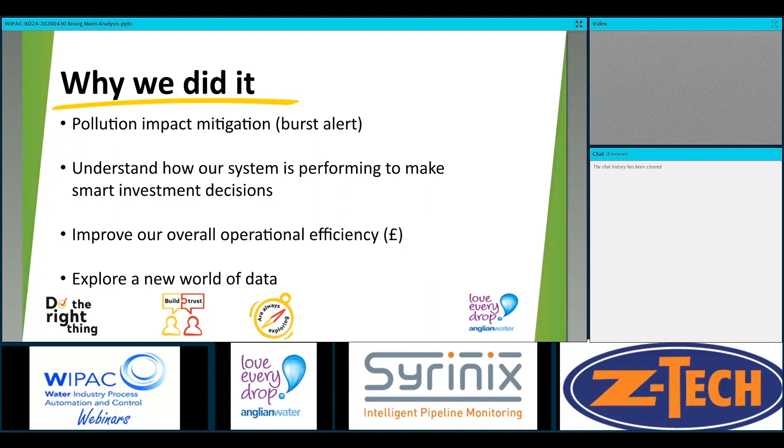Let's go on to the next slide. So I'll talk a little bit about how we did it.

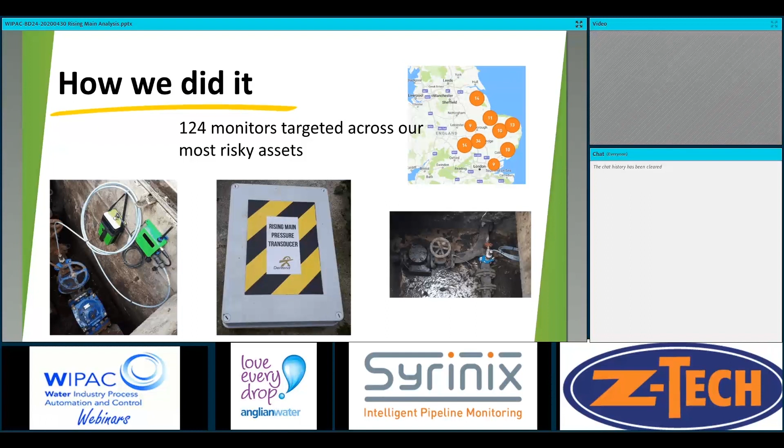We have installed 124 monitors across our most risky assets. Predominantly the assets were picked by how many bursts we've had on them. Some of it was around the locations of the sites, where the rising main locations were going through sites of special scientific interest.

There's quite a wide spread of different varieties of assets, from 2-inch up to the largest I've seen, about 600 mil. So we've got a really good data set from all different types of materials of rising main, all different types of pumps, speeds, pressures, and we've got a really good learning that we've been doing for the last year and a half, two years, and we've accelerated that within that period.

And how we did it, you can see from the pictures here on the bottom left: on every site, on every rising main, we put an under pressure tapping. We put a 1.5 inch under pressure tapping, separate from any other mechanical piece of instrument or device on site.

So we started off in the trials putting it on top of non-return valves, but we separated that. We didn't want them on there because non-return valves are a maintainable piece of kit, and we were worried that if we started to maintain that, it could damage the sensor. So we tried to keep it completely separate within the dry well. We put an under pressure tapping, a really easy, non-invasive, cost-effective way of installing these units, so there's very limited disruption to the network.

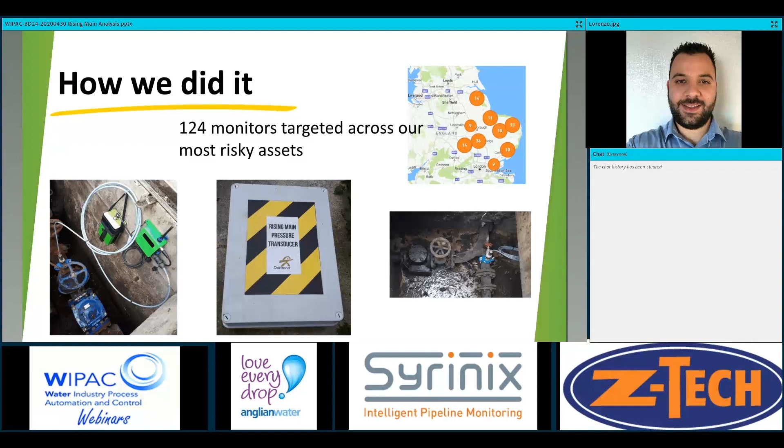So in order to start collecting data from these sites, early in the project we had to develop a new transducer. The potable water monitor had an internal transducer with a small port, which was likely to clog with rag and fats, oils and greases in the wastewater. So we designed a remote transducer with a large open diaphragm, on the under pressure tapping that Lorenzo mentioned, so that we wouldn't get ragging and clogging problems.

It's on the end of a cable, so that we could separate the telemetry device from the transducer if we were in deep chambers, where you want the transducer down on the main and the telemetry device up at the top where the cellular signal was. The other reason for the separation was so that in future we can more easily go for ATEX approvals, introducing an energy limiting device in the cable to produce a transducer that's able to work in a zoned environment, with the telemetry device positioned outside the explosive environment. But we haven't been pushed to do that yet.

In terms of the data feeds, the device is monitoring pressure 128 times a second, all the time. So you have this continual feed of very high sample rate pressure data. And then we have algorithms on the device looking for pressure transients, sharp changes in pressure, and sending those.

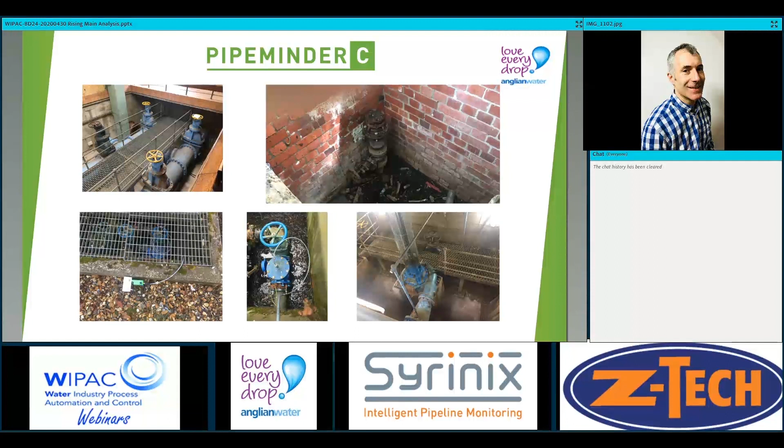As Lorenzo was saying, the mounting method's been refined as these 124 devices have gone out. He's developed a very tidy installation, mounting it to the side of the chamber wall. So you can see the battery and the telemetry device here, with the transducer on the pipe.

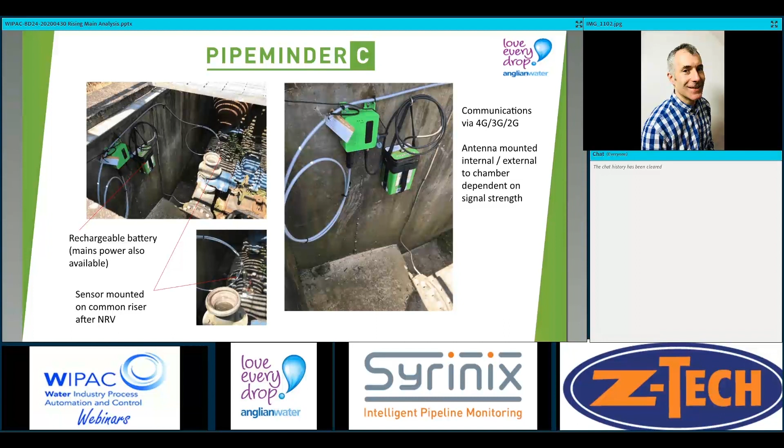Hydraulically, we're monitoring after the last non-return valve, and in this case we can show the pressure transducer just after the last isolation valve in the dry well. We see the static head from the high point, the pump delivery pressure.

In terms of failure modes that are visible in the data, you can see quite a lot. When the pumps are running, we see the delivery pressure. If the pumps are performing differently, we might see the delivery pressure alternating between the two pumps. If they're running in a duty standby mode, you'll see a good pump, then a bad pump, so the pressure will go up and down depending on which pump. That kind of behavior is very obvious in the data.

A poor performing pump could be a blocked suction on one pump, a worn pump, or it could be a passing non-return valve on the other pump causing some recirculation.

We can spot passing NRVs: if when the pumps are off, the static head seen at this monitoring point isn't constant, but droops down over the course of the 15 or so minutes between pump runs. It's possibly the main draining down from the top, causing a reduction in that static head.

We can see drive faults, where the pumps are starting and then stopping very quickly, and that's very visible in this pressure data. If the non-return valves after the pumps stop aren't closing properly, or are very slow to close, and some reverse flow builds up, we can see very large water hammers caused in the mains from the non-return valve slam, and again that's very visible at the pressure monitoring point.

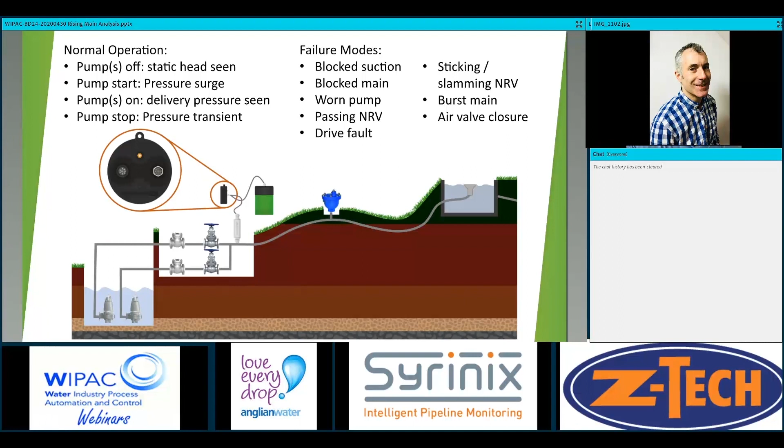We can also see air valve closure events, so slamming of air valves, and sometimes in steady state data some evidence of air valve closure and change in state on the rising main.

So there's quite a lot to see in the data.

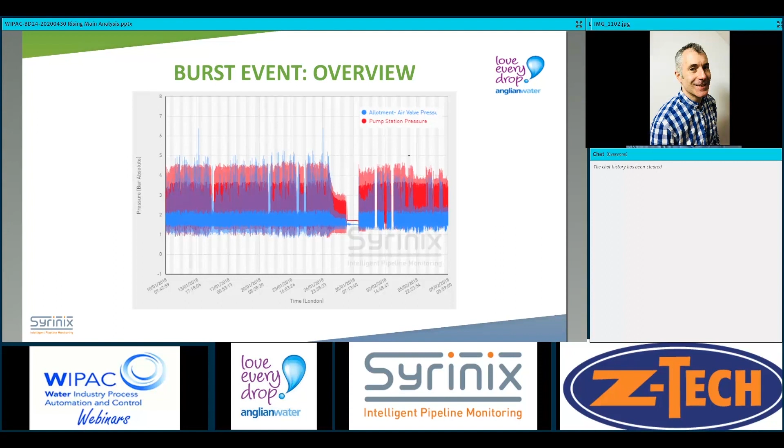If we look in a bit more detail at that failure, you can start to see the individual pump cycles popping out on this plot. The colours have changed - we're now red at the pump station. The dark blue is the mean pressure, and the light blue is the excursions on the starts and stops.

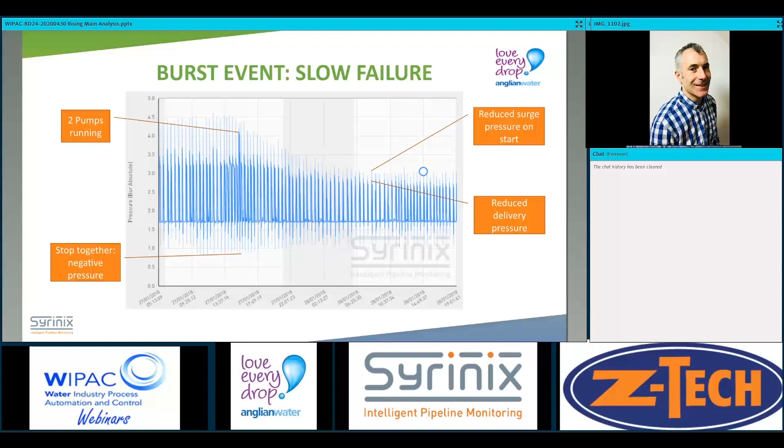You can see that just before the failure, this drop in delivery pressure over 2 or 3 hours was a much higher delivery pressure, which was from 2 pumps running simultaneously. If you look in even more detail still, this is 3 pump cycles. You can start to see some of the high sample rate data overlaid on top here within the min-max envelope. This is on the left-hand plot, the first pump run is the one with the much higher delivery pressure.

What happened is the 2 pumps stopped at the same time and caused a very big negative pressure, so much lower pressures than we'd normally see after a stop. The fluid's still moving away from the pump station. When the pumps stop, it causes a suction at the pump station. 1 bar on this y-axis is atmospheric. It's an absolute transducer, so anything under that is a vacuum in the pipe. On this pump stop, we caused a 0.3, 0.2 bar vacuum in the pipe immediately after the stop, which could have been worse further away from the pump station.

If the elevation goes up slightly, you'd have seen a bigger depression. So after this event, having captured this event, we thought, well, we've got our first ideas for an algorithm for spotting bursts here. We're going to look for a low delivery pressure.

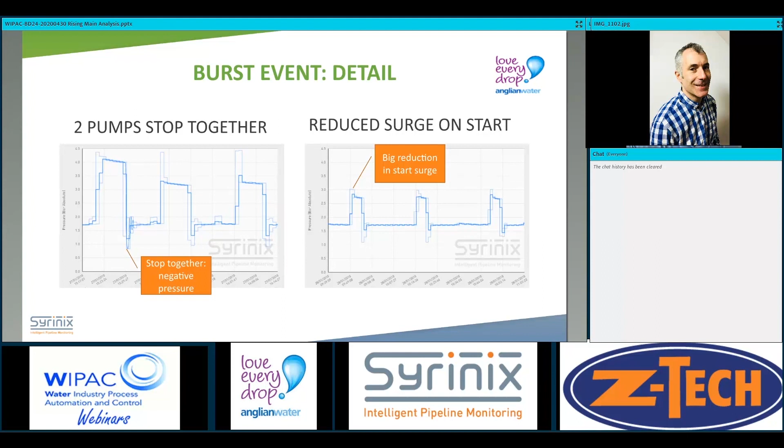And the negative pressure from the 2 pumps stopping at the same time, we believe, dislodged the rag plug. Then over the following 2 or 3 hours, the positive pressures pushed the rest of it out. So we saw this sudden stop causing a dislodging of the rag plug.

Sorry, I'm just going to ask for background noise to calm at my end. Guys, can you be quiet, please? Sorry, I've got a whole family of kids behind the door.

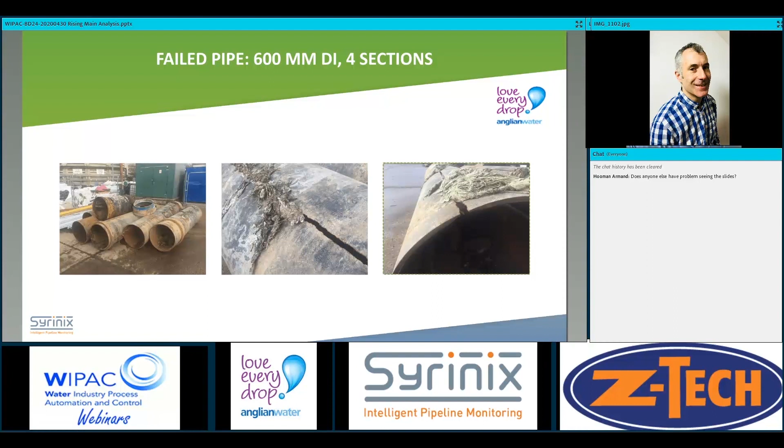So you can look at some pretty simple models to look at why the delivery pressure would reduce when you have a failure on a pipeline.

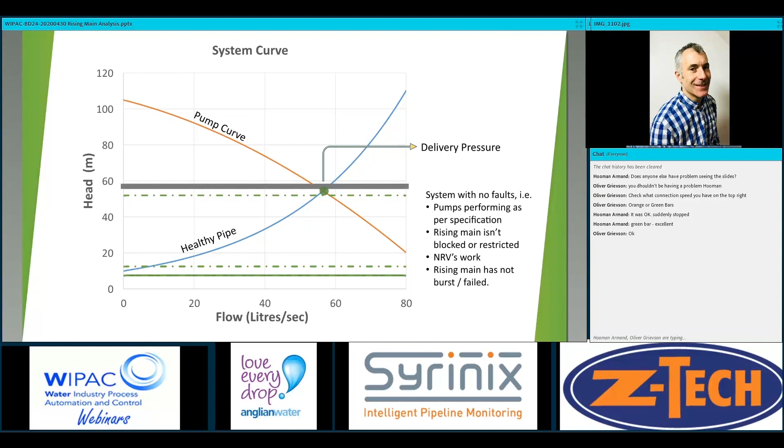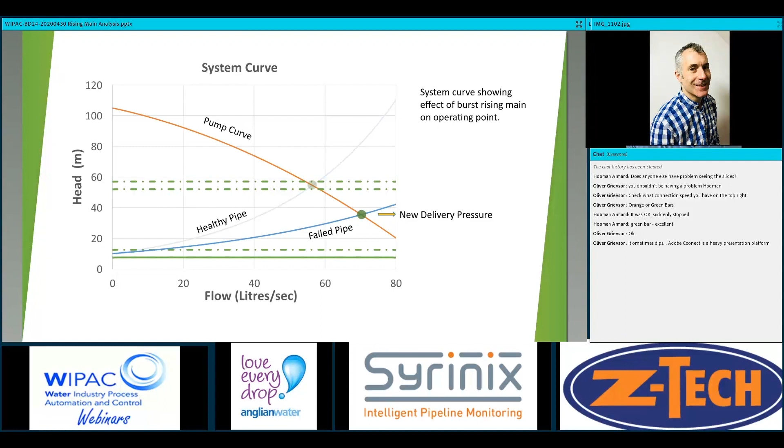If we look at a failed system where there's a burst in the pipeline, you would expect the pipeline response to change. So the pipeline is now less restrictive, and the intersection point between the pump curve and the pipe response changes, and we'll see a reduction in the delivery pressure and an increase in the flow rate. This is what we're looking for in the burst alarm.

So if we return to the example data, what we're saying we want is a means to spot where this mean value is marked up. We want to be able to pull those points out from the data and see when they've reduced.

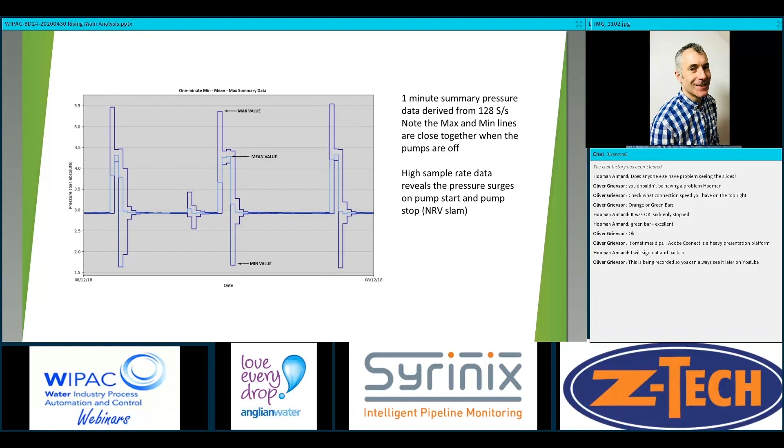The key thing, as I was saying earlier on about the stabilized delivery pressure and the stabilized static head, is the value range. So derived from 128 samples a second, the range is very small. So if we were to, for each minute of data, look at the range of values, if it's small, then we can run a test on the data to see where the mean value sits. The best way to do that is with a zone plot, we found.

So if you take each minute of data and plot it as a cross on this diagram, on the x-axis is the mean pressure in bar, and on the y-axis is the range of pressure seen in that minute.

You start to see in this zone 10, the second zone across on the left, on the bottom, a cluster of points around 3 bar for the static head. So this is the static head zone.

So when the pumps are off, you see data in this sort of area. And when the pumps are running, the mean pressure goes up to about 4.5 bar, so you'll see a cluster of points here.

And the transitions between off through to on are a big transient with a large range of values, and they go up through these three zones in the top.

So by looking at which zones the points appear in, we can start to build up a picture for how the system is operating and whether there's a fault.

So low delivery pressure, for example, would result in all of the running points dropping into this zone 20. A low static head, for example, the main draining down and we're seeing this reduction in static head, we'd start to see a small tail heading into zone 00 down here.

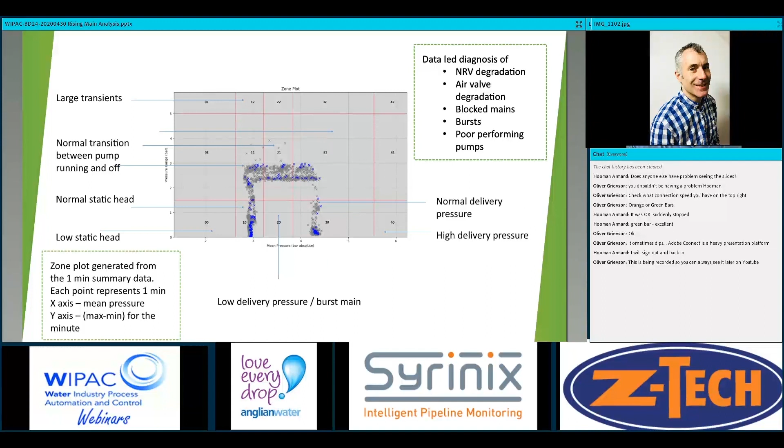So one of the things we started looking at was histograms for these zones. So if you label each of the zones with a text-based label of what you think it is, you can start to look at a counter of how many minutes are seen in each state. You can see for each day you've got 1440 minutes in a day, and you can mark up how many minutes are spent in each state.

We haven't actually used this yet, but we felt this was quite a good way of visualizing how a pump station was performing. And when you start to see undesirable states creep in, like low delivery pressure, you know that faults are starting to occur. If you see all of your delivery pressures as low delivery pressures, you might conclude it was a burst, and that's the basis for our existing burst alarm.

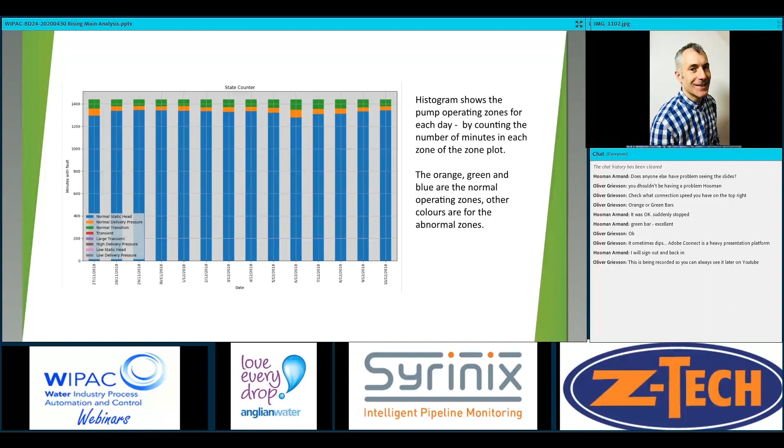This next slide just shows a different burst. Actually, we've caught probably 10, 15 bursts, I think - I'll confirm a number with Lorenzo - but this is another example of a burst, and we've got some different plotting algorithms here, but it's the same sort of visualization method.

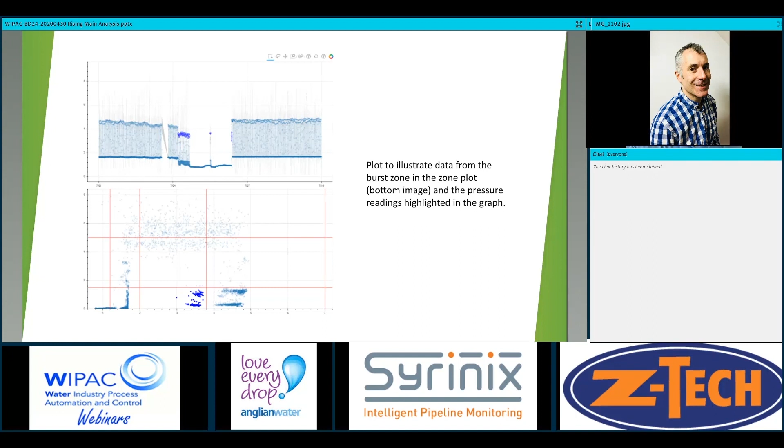So in terms of configuring this burst alarm, we need to know what the expected delivery pressure is and what the expected static head is.

We found two ways of doing that. The first way is empirical, so you install your tapping, you put the device out, you examine your data, look at the delivery pressure and static head.

If they look stable and you're seeing no drain down, no big slams from the non-return valve, and the delivery pressures are nice and stable and the pumps are performing the same, your conclusion from just looking at the data is the system is probably performing okay, especially if you know you've got no leaks and you've walked the line maybe. Then you can simply set upper and lower limits for delivery pressure and static head based on what you've observed in the data.

But another method, and a slightly more robust method, is to predict what the delivery pressure and static head should be. So we take the pump curve, we take the long section, get the static head from the long section, calculate the friction head loss from the length of the pipe and the diameter, and predict from the system curve what the delivery pressure and static head should be.

And if you take this more analytical approach, you have the added benefit of spotting pre-existing faults. So if you've already got a leak on the main and the delivery pressure isn't where it should be, or the pumps are worn, you can start to spot a system that isn't performing as it should be, even though from the shape of the data it may look okay.

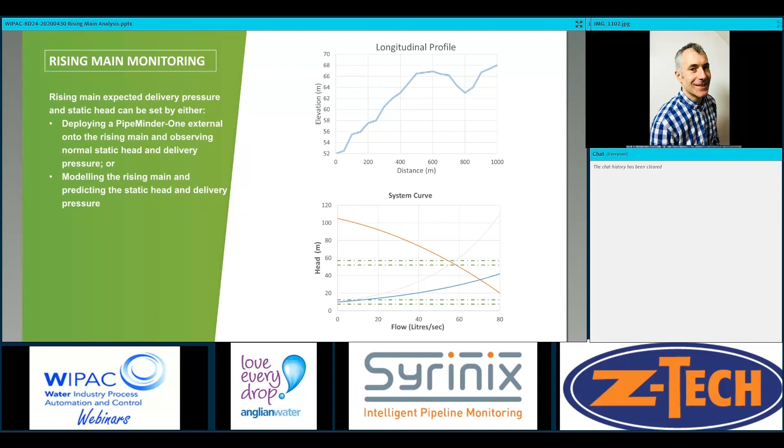Just a small section on air valves and air in mains. With trapped air in mains, it's generally undesirable to have big pockets of air in rising mains. One of the main problems is it normally contains corrosive gases, like H2S, which can age your pipeline prematurely.

It generally occurs on the downhill sections of the main. So in this case, this section here is where the air pockets would start to build up. If you didn't have the air valve, they'd be in there.

It means that you get a gravity flow downwards. You lose the benefit of the suction head from that, so your delivery or the apparent head of the main increases. So you have to pump harder, and you're less efficient pumping down the main.

It's a restriction, and it can cause reflections in transient waves. So when you get a pump stop, we get these rings which reflect from the end of the main normally, but they'll reflect from a different point. That's not always a problem, but it's a useful way of diagnosing if you've got a reflection point that's not the end of the main.

The other problem is that you can get water hammer when the air is expelled. If you imagine you've got a pocket of air at this high point and an air relief valve is working, you start the pumps, you push the air out by pushing flow in from the pump station side. You've got a static column of water to the right. Once all the air is gone, you've got water moving at maybe 1 or 2 meters a second towards a static column of fluid.

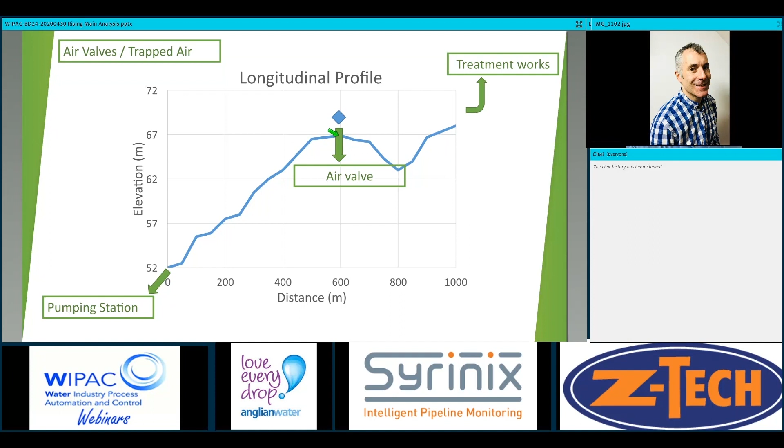So when the air valve closes, these two columns crash, and you can create very large water hammer events. Often they're not visible at the pump station, so if you're monitoring there, water hammer events from air valve closures partway along aren't always visible. They won't pass through other air pockets, for example. In a few instances, we've also looked at monitoring partway along the main, and we have found air valve events that weren't visible at the pump station. But for most mains, just a single monitor at the pump station seems to work.

We've been continuing, as Lorenzo said, to evolve and develop the products. We're actually moving away from the green telemetry boxes with the display and moving to a simpler variant. It's got no screen.

So I've got a window popped up.

It's got no screen, so we're trying to reduce the cost a bit, but it's got quite a few improvements. It's got a 4G modem in it, a brand new processor, new firmware on the device, and a much better operating system that gives us a lot of ability to do more analytics on the device if we want to in the future.

We've got a new communications method with radar, which is much more reliable. That combined with the 4G actually gives us, as long as you've got even a marginal cellular signal, almost complete data transfer, so we don't get any gaps now. It's quite an improvement.

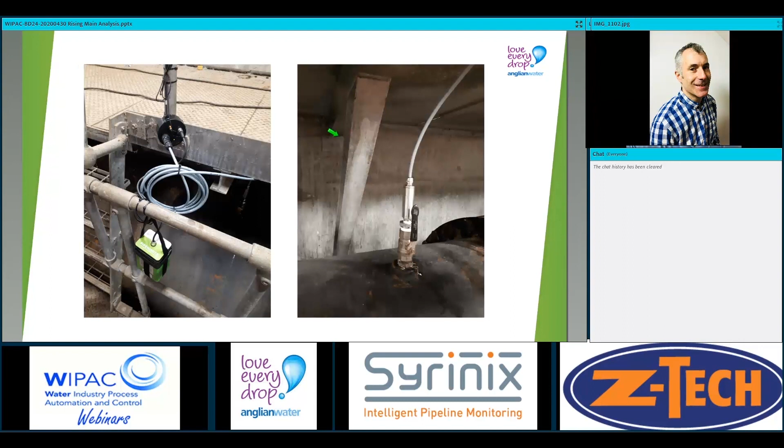So that's called PipeMinder-One. In terms of the data coming from these devices, all of it ends up in Radar, which is our cloud platform. So Anglian Water have accounts. As soon as you've bought one device, you get a managerial account on Radar, and you can then create sub-accounts for as many people as you want, so the information is available across an organization.

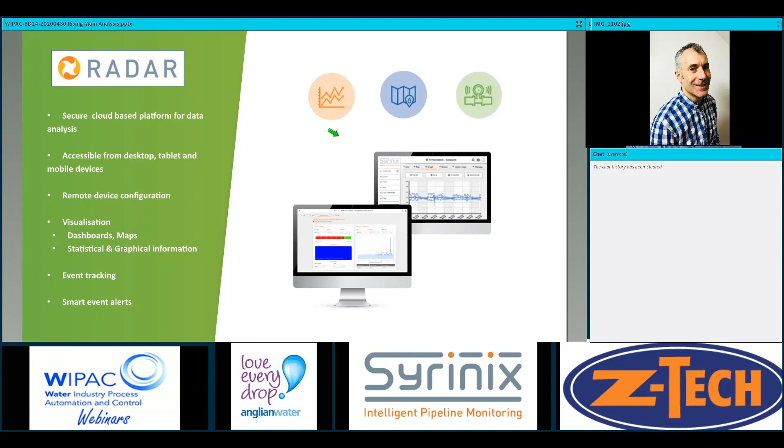From Radar, you can do device configuration, view all the data, set up alarms, and we can set up API access so that you can pull data out automatically. You can get alerts for primary alerts about functions of assets, like the burst alarm in this instance, but also status alerts for devices - if the batteries are running out, or it's gone offline, or anything else that's going to mean your monitoring isn't occurring effectively. Then you can be alerted to it and take proactive action.

Here we've got an example of the burst alarm for rising mains. We send emails out to customers automatically when a burst is detected. It's got about a 6-hour response time, so we're analysing 6-hour blocks of summary data to look for failures. At the moment that's quite a big improvement on where the response time was for bursts.

But we think we've got ways to improve this still. The existing burst algorithm is all right, I'd say. It picks up probably 70% of bursts, but it also misses some, and it has some false positives. The algorithm was developed off the back of 1 or 2 bursts and has been run for a year. And as Lorenzo was saying, we've got a wealth of data now from 120 devices out.

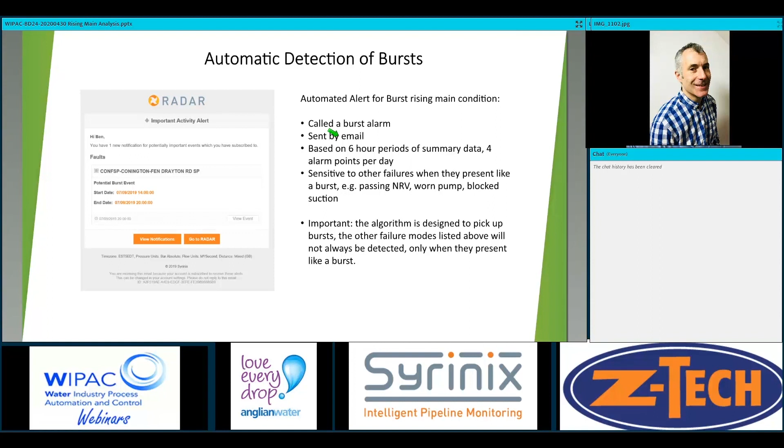We've actually got a program of work going on now to take the next step with the algorithm and massively improve its accuracy. So we're aiming to deliver not only a much more accurate burst algorithm, but secondary alarms for other performance indicators on the main, whether it's blocked pumps or passing non-return valves, that sort of thing.

Just to reiterate, when you're looking at data on Radar, it's possible to use manual data analysis of the data in Radar to infer all sorts of other failures, and we're looking to automate these in this new revised alarm.

I think I've spoken for enough. I'll pass back over to Lorenzo, and he's got some great case studies with examples from their work.

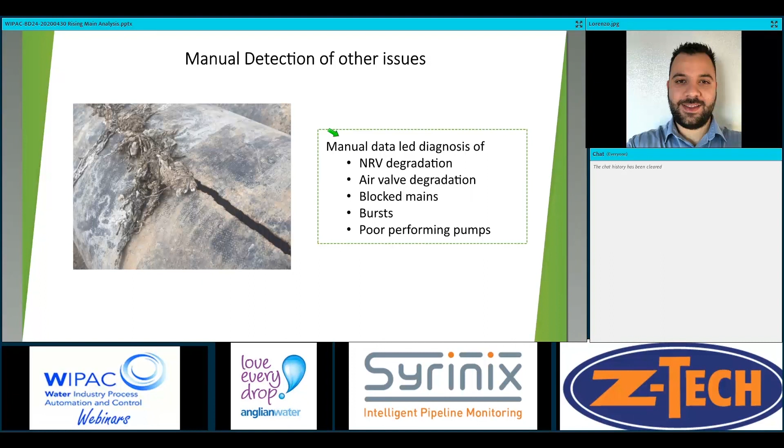Thanks, Ben. No one can hear me. Just put it in the chat, and I'll bring the microphone closer to my mouth.

So I was going to go through some case studies that we've seen since we've put some monitors on, just covering why we wanted to do this monitoring, to show you some of the benefits that we've seen. So, burst alert.

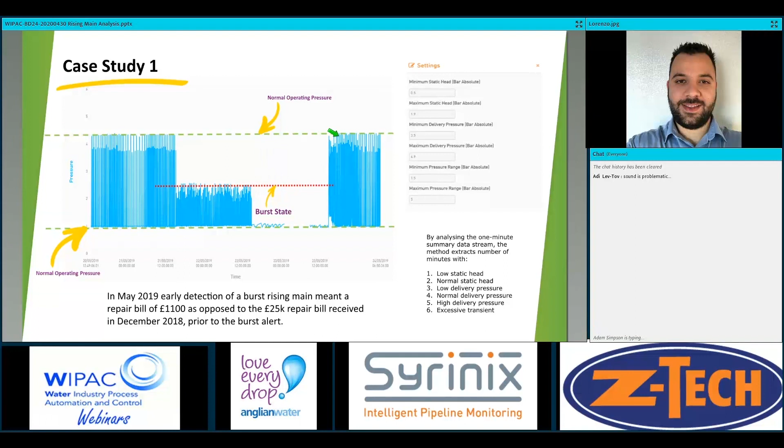On top of that, another thing that we've been looking at as well is operational efficiency. The acceleration of exploitation has really happened by putting loads of sensors out there and seeing loads of data.

So we have an optimization analyst within the team who looks at this data on a daily basis and sets the burst alerts up. While we were setting burst alerts up, we were coming across different data sets. We wanted to know what those shapes meant, what that data meant. And this was one scenario.

What that would do is the rising main would drain back into the wet well, which, as you're all aware, is not efficient. That's not how a non-return valve should work. It poses several other risks in terms of surge and emptying the rising main, in terms of gases, etc.

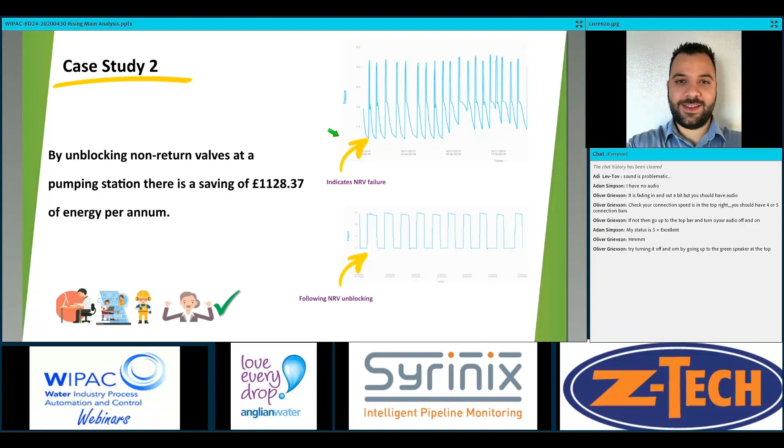Another good one, and where we've really expanded on this, is we've worked with some of our modelling partners in terms of exploring this data further with Atkins, and within our own internal modelling team, around exploiting some of that surge data.

Yeah, and with... sound problematic. I'm reading something. It might be in my headphones. Sorry.

Okay, so we've been using modelling data as well to exploit the surge analysis. We've been using tools such as Wanda, which is a surge analysis tool, and we've been taking a load of static information from the pumping station, so the elevation of the rising main, the pump curves, what air valves we've got, etc.

We've been inputting that into a model, and then we've worked out how a rising main should operate based on the static data, and compared it with the live data we've been getting from the Syrinix monitor. That's been really powerful in terms of understanding, especially for sites that are bursting frequently, how we should be operating them. This is a really good case study on this site.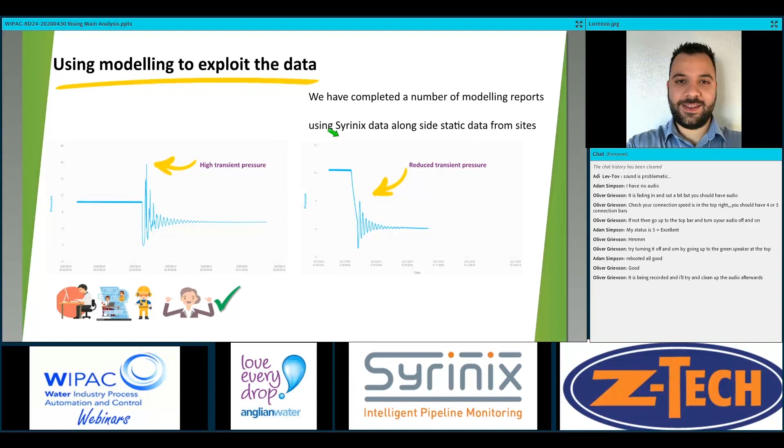This is another slide on that case study, from the surge analysis tool. This is what's really powerful with it - we hadn't made any changes, but this would show us what would change.

This is really powerful in terms of giving confidence to operational staff around the solutions, because some of these solutions have not been implemented before around VSDs on pumping stations and the way they've been controlled. We've had VSDs and pumps for years, but the way that we're controlling them is very specific for the purpose we're trying to serve, which is reducing burst frequency.

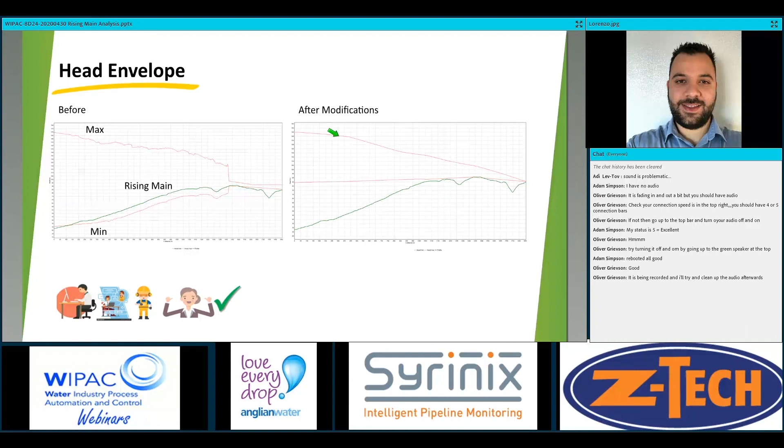Just going to touch on benefits. While we accepted at the beginning that we weren't going to be able to reduce bursts when we first started using this technology, we wanted to reduce the impact of when a burst did happen, and we succeeded in that in a number of cases.

And Ben's sort of highlighted as well - we are now at a learning stage, and I've never seen a project like this in the way that we have learned and explored. We've put loads of these sensors out, we learnt loads.

We have missed some bursts, and now we're investing in improving that with Syrinix. So we are now building a more robust algorithm which can actually pick up on events that we have missed with the current algorithm. That's going to increase our visibility of bursts around the business.

We are again working with Syrinix. Now we know what a non-return valve failure looks like, we can now start to automate that approach.

We can put, say, 50 sites into a hierarchy list of what sites are failing, because we're constantly monitoring them in terms of their non-return valve failure, and then we can prioritize that potentially on energy spend, for example.

So we could go and send contractors or our own technicians out to have a look and unblock NRVs, replace NRVs, to then reduce our carbon footprint, reduce our overall electricity consumption, and protect our rising mains as well, because the non-return valves serve a purpose in terms of how they support the surge on the rising main.

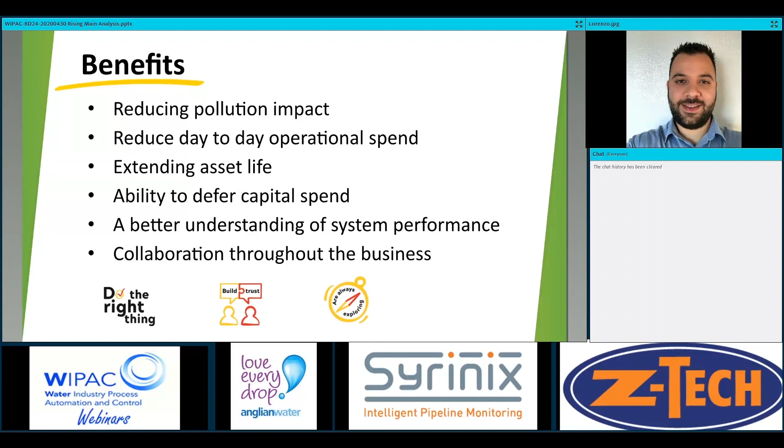And with a better understanding of system performance, we can start to pick up on pumps that are wearing. We can then start to introduce maintenance standards, etc., and target those assets.

Just to quickly elaborate on this, we're improving our burst alert. We're going to start automating maintenance alerts around non-return valves. We've started to integrate this data into our OT platform, so we've integrated the data from Radar's platform around the burst alert, and it goes straight into our telemetry system now, which is a massive win-win for us. That's an area we're exploring more.

And we're continuing to innovate with Syrinix at the moment with pressure monitoring data. We're seeing benefits on a daily basis, and the business is really engaged, especially our operational teams, with the data, and they're seeing the benefits.

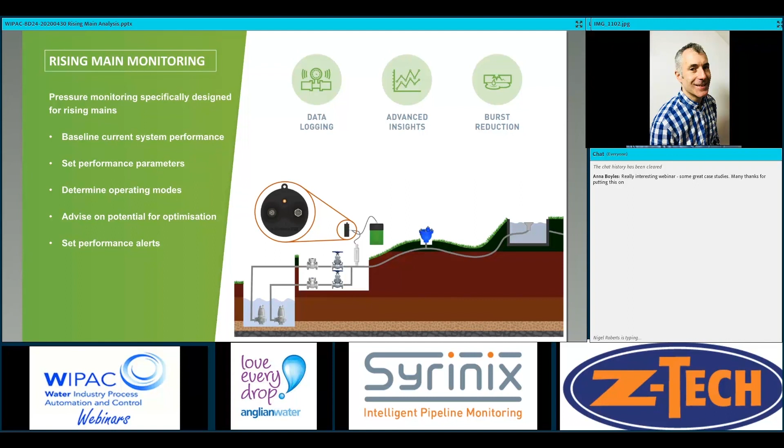From Gonzalo: please could you explain the benefits of using an external pressure transducer? Yes, so the first one is if you've got a deep chamber, you want your pressure monitoring point perhaps at the bottom of a 5 or 10 meter chamber, but you want the telemetry device at the top where the cellular signal is strong. That's the first reason. The second reason is you don't want a long line to the transducer because you get head loss, and you can get clogging and blocking of that line, so you want the face of the transducer right on the pipe.

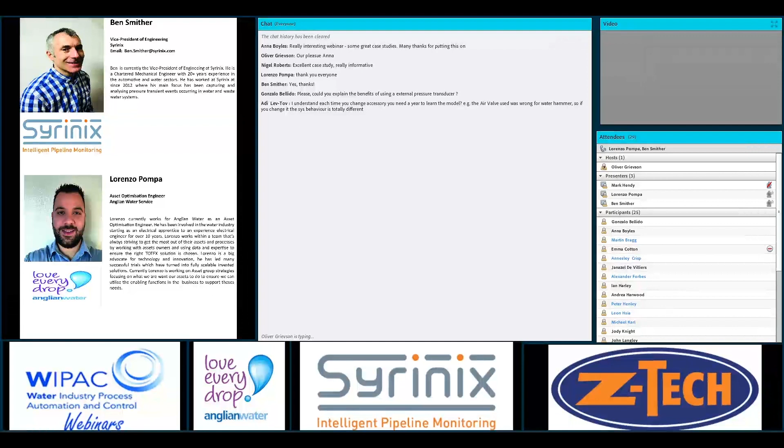The other reason is that we wanted to split the system from an energy point of view. We don't have ATEX approvals yet, but by splitting the system, putting the high energy cellular stuff in a package that can be positioned outside of the explosive environment, it means we've only really got to worry about the transducer when we come to do ATEX.

There's a question from Adi: I understand each time you change accessory, you need a year to learn the model? For example, the air valve used was wrong for water hammer. So if you change its behaviour, is it totally different?

I'm not sure about the year learning timeline. The change is very quick - if we put a device on a rising main, we can look at the performance within a day or two. We'll get enough cycling to see what's going on. I'm not sure why it would take a year.

Anything from you, Lorenzo? There's a question from Anna Boyles: what roughly would be the initial outlay per installed unit and any associated costs for telemetry? I'd presume there'd be an economy of scale, to be honest, but we need Mark Hendy for this.

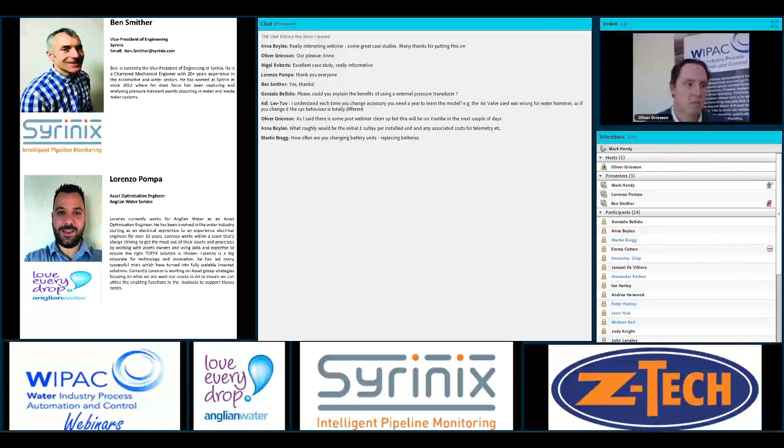In terms of the data and the radar licensing that gives you access to the platform, typically a SIM card costs about £120 a year to send up to 50 megabytes of data each month, and on top of that you have a radar fee of £275. The advantage of joining now is that the hardware is being cost optimized. It really depends on whether you want rechargeable batteries - Anglian have taken the approach to go mains powered, which reduces the cost again. But ballpark, think around £1,800 for a unit with a rechargeable battery.

A question from Martin Bragg, which has possibly just been partly answered: how often do you change your battery units? The rechargeable battery - we've seen the good performing ones lasting just over a year. But we also have alkaline packs available, various battery options. It's an external pack, so you can do that, or you can have mains power if you'd prefer.